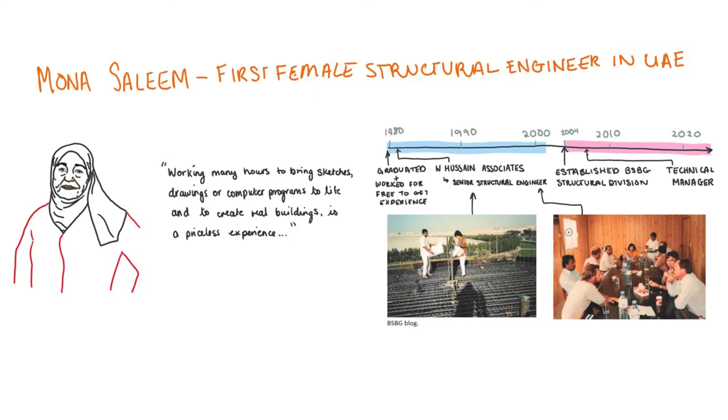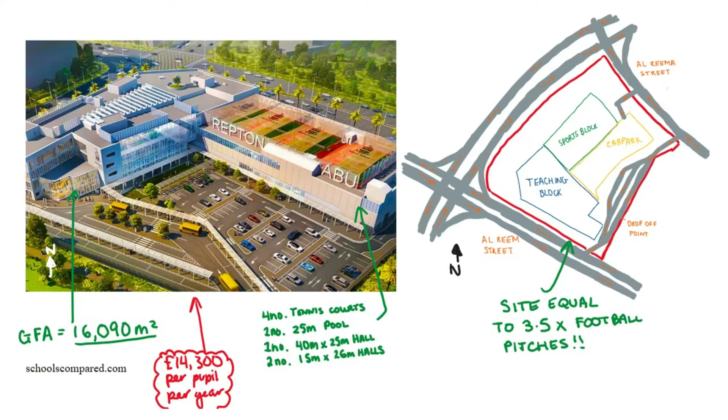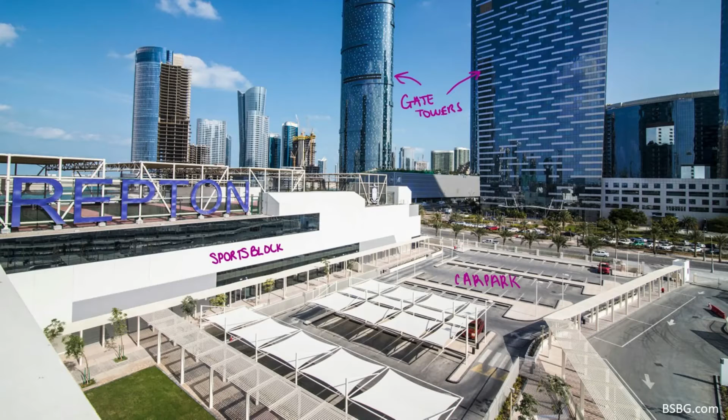Mona Saleem's firm was lead consultant for the design of a luxurious private school on Al Reem Island, Abu Dhabi. It accommodates 1,800 pupils and is situated on a 25,000 square meter plot. The client wanted specialist facilities with large volumes of space. This resulted in two main buildings, one for teaching and another for sports. The teaching block is a 4-story building with a large central atrium and a basement car park. The sports block is a single-story structure, approximately 10 meters in height with large uninterrupted spans.

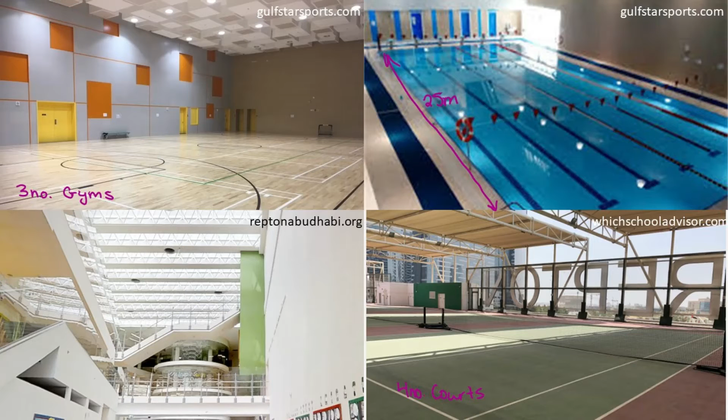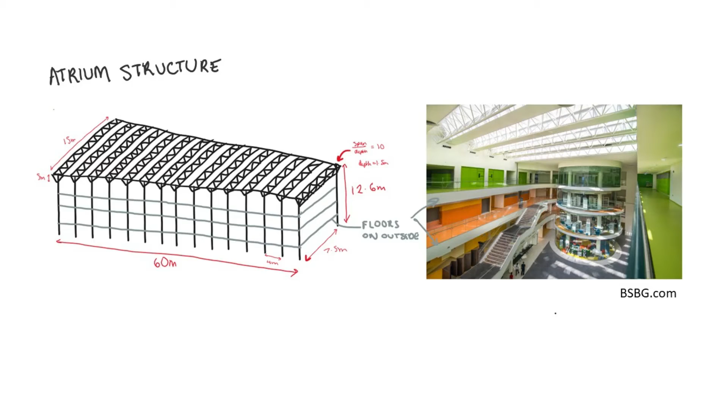The key drivers of the project drove many of the structural solutions of the building. The client strives to be a global leader in private education, so wow factor was important in design. This is mainly expressed by long spans, a 4-story atrium, cantilever stairs, and extensive sport facilities. In the teaching block, the atrium tapers in width from 7.5 to 15 meters. These roof spans were achieved using a transfer truss system. The surrounding floors are supported on a steel frame where spans vary from 8 to 10 meters.

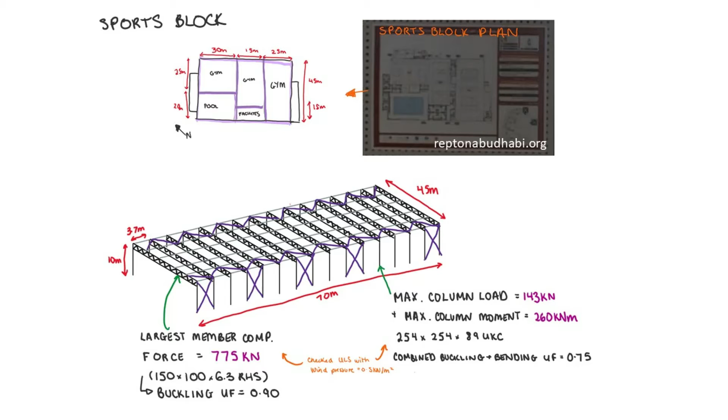The sports block required long spans of 45 meters to house numerous facilities similar to the Bath STV. This is achieved using Warren truss beams. The roof needed to be flat as the site could not house all required facilities. Surrounding roads drove design vertically. Another key driver was rapid construction, as the client needed the project to be constructed within a year to be ready for the new school term in 2017. This is why there are many repeating elements, prevalent on the atrium roof truss, where members were the same regardless of span.

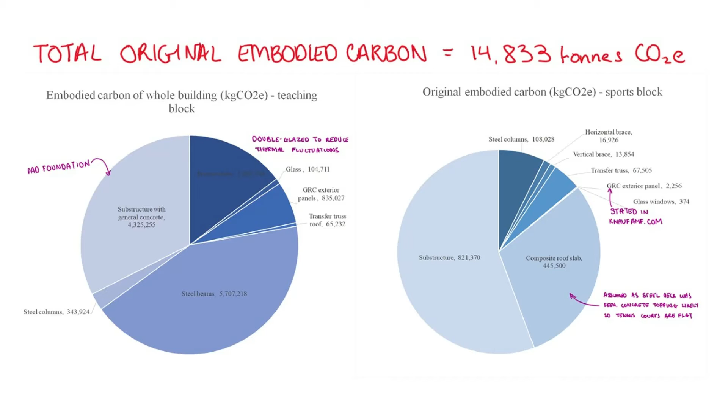Legislation in the UAE requires all new build projects from 2010 to achieve at least 1 Pearl rating. Examination of these requirements shows that the achieved mandatory credits focus on reducing operational carbon rather than embodied. This may have influenced design. Overall, few innovations could be identified due to drivers. As a result of drivers and solutions, embodied carbon of the building was significant. In total, it was almost 15,000 tons of CO2. In the teaching block, steel elements were responsible for the majority of embodied carbon. For the sports superstructure, it was a composite roof.

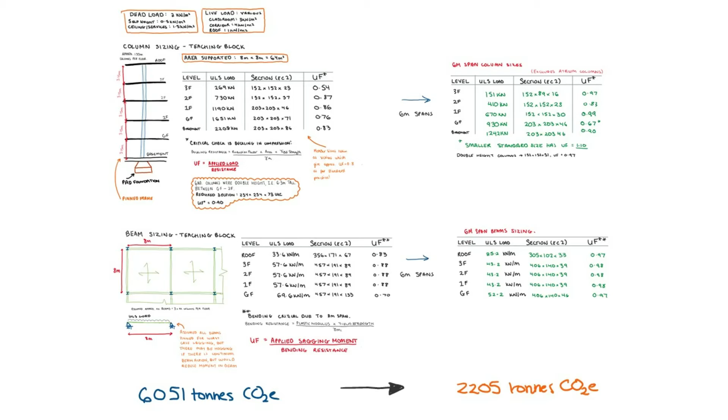From these findings, carbon reduction could be achieved by making changes in structural design. In the teaching block, spans were reduced to 6 meters, different materials were selected, and the atrium roof was changed to a grid shell structure. The change in span made drastic reductions of carbon. 6 meters still gives a sense of large space while being more economical in terms of carbon. Reducing spans meant beam sections and columns became lighter as they resisted lower loads overall. Also, all new members were sized with UFs closer to 1 rather than 0.8, which is standard in industry. A regular grid was assumed throughout the building, so quick construction is achievable.

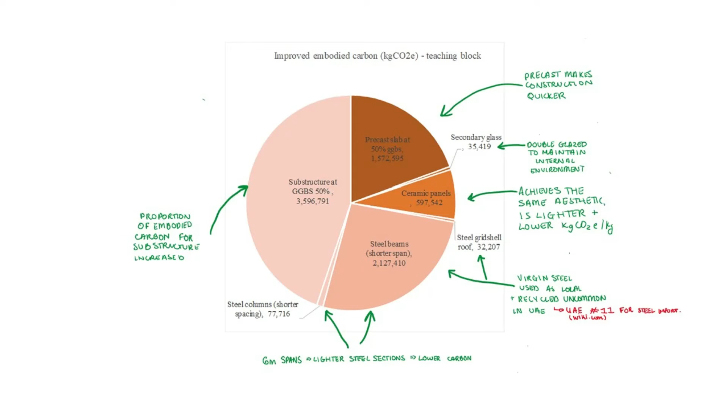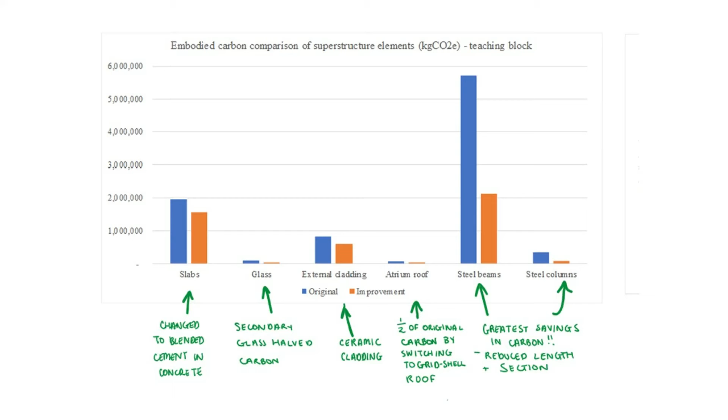Use of virgin steel was assumed in the improved carbon calculations, as sources of locally recycled steel are scarce. Regardless, carbon savings of over 3,500 tons were achieved for the primary steel frame. Changes in materials, particularly the concrete and cladding, also decreased overall embodied carbon. Lightweight ceramic cladding replaced GRC panels to achieve similar aesthetics and made savings of 240 tons. Concrete with 50% GGBS replaced general mixes. Only GGBS seems to be commercially available in the UAE, so potential further savings using other blends are not always feasible.

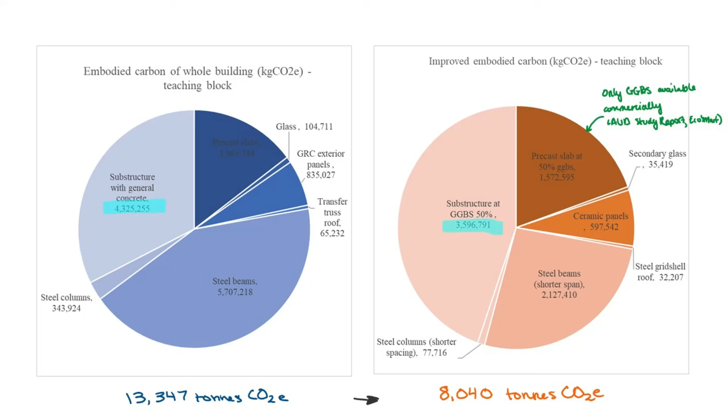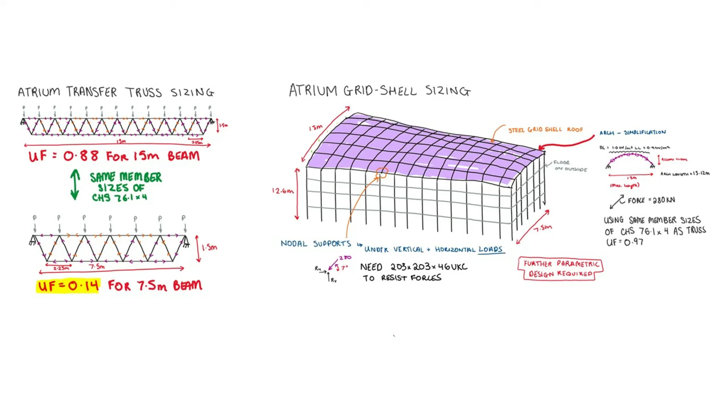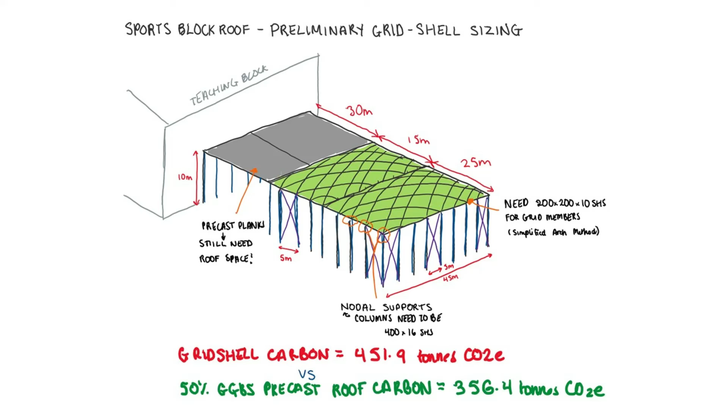The atrium roof was also converted to a steel grid shell, which halved the element's carbon as the truss system was structurally inefficient. Timber grid shells were initially considered, but due to a lack of local supplies, this was deemed inappropriate. In the sports block, several options to reduce carbon were explored. Initially, a steel grid shell roof was considered, but because of large spans and forces, member size increased, meaning carbon savings were insignificant. Also, a curved grid shell reduces the roof area required by sport facilities. Instead, the composite roof was changed to precast planks to reduce carbon, maintain required facilities, and ensure ease of construction.

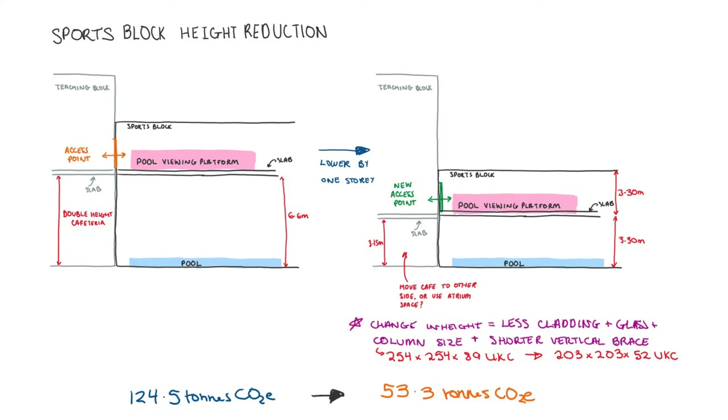Further, reducing the entire building height by 1 story could reduce carbon significantly. Access between the teaching block and pool viewing area was probably why the pool was triple-story, which felt quite large. This change reduced carbon by over 70 tons. Overall, the changes to both buildings resulted in savings of over 5,500 tons of CO2. Other measures to improve the building's whole life carbon should be done to achieve a higher Pearl rating. This would further the building's status and align with the client's goals.

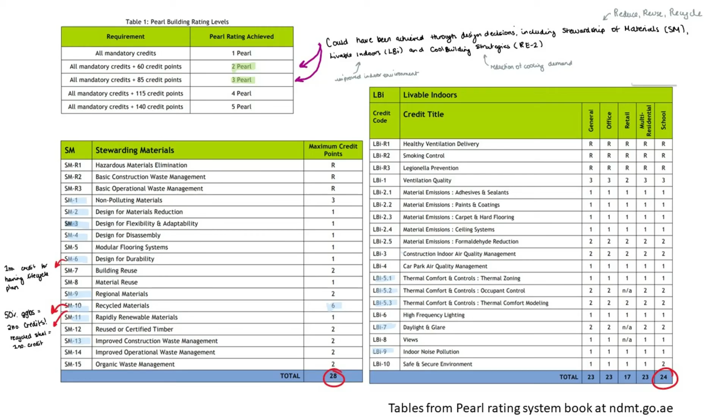I believe the building is an example of how key drivers can conflict with low-carbon design and hinder structural innovation. Unfortunately, this building type may be common in practice, but minor structural design decisions can alter the project's trajectory towards sustainability.